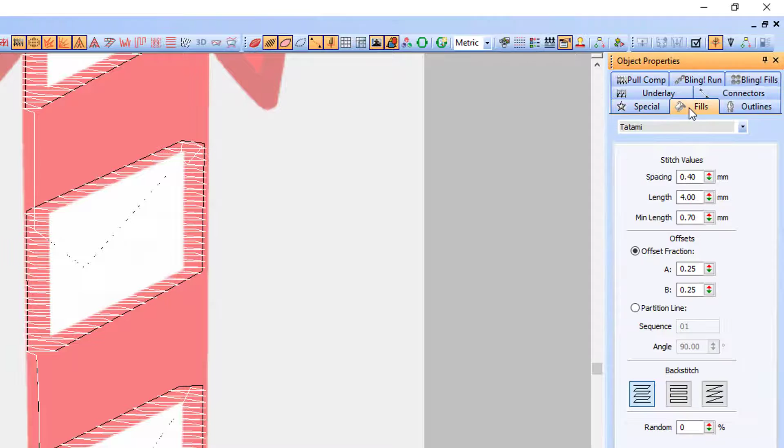Okay, so now we're going to switch to our red. And for here, what we're going to do is switch our underlay to an edge walk. And the reason we're putting an edge walk underlay is because we don't want the red and the white bleeding into each other. We want a nice crisp edge.

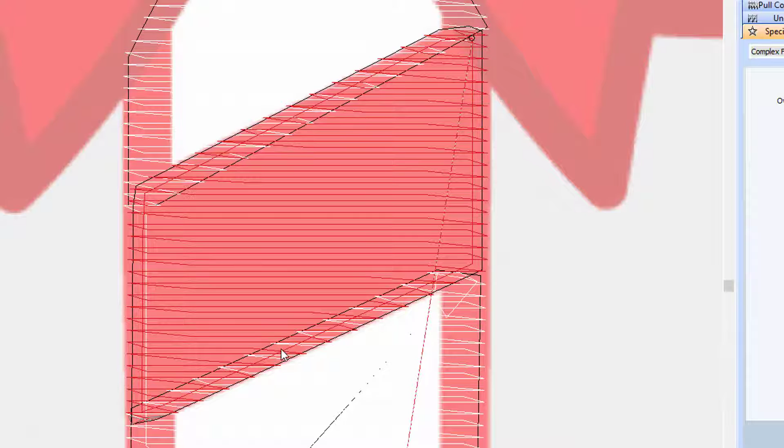And what that edge walk underlay does is it creates a sort of bridge, if you will, between the two so they won't sink into each other. So that way you get a nice crisp edge. You can also achieve the same result by giving the edges of your fills where they meet two different angles, so that way they don't sink into each other. But I want them to run in the same angle here, so that's why I put that edge walk underlay.

Okay, so we did our first red fill. Now we're going to travel to the next one using our running stitch. Click on our complex fill to do our complex fill object again.

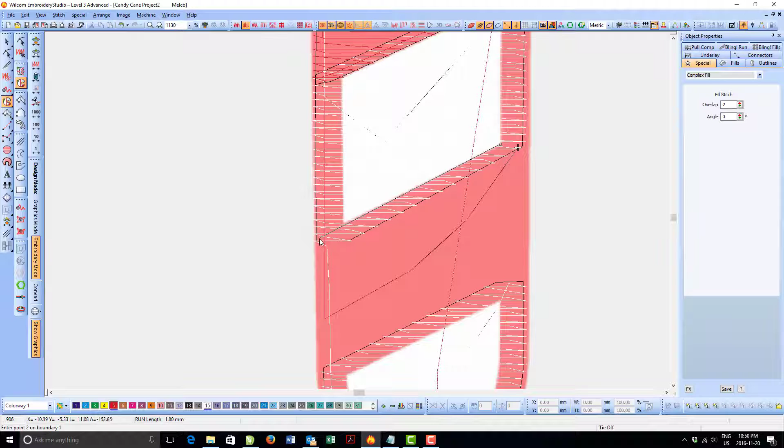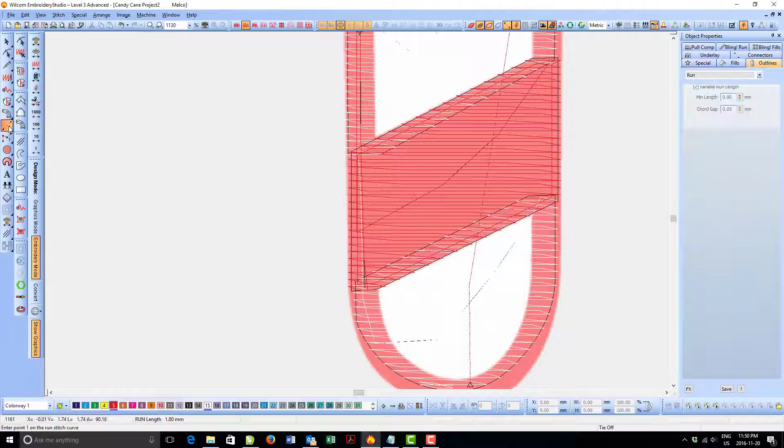Now, one thing that you need to keep in mind also is when you're digitizing and you're accounting for the push and the pull, you need to realize that the stretchier the material is, the more pull and push you're going to have, and materials that don't stretch so much, you'll have to compensate less for.

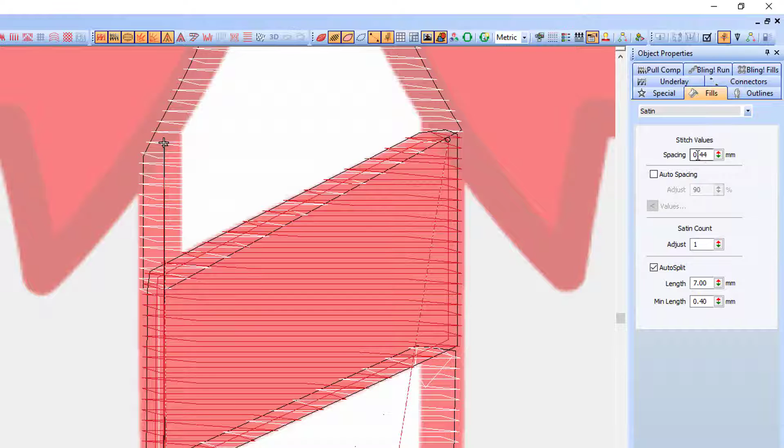Okay, so now what we're going to do is we're going to select our Input C tool or our Centerline Input. Basically what this tool is, you digitize a line, and then the software puts in a nice even column at the specific width that you give it. And in this case we're going to use a 1.5 millimeter width column. And for that width of a column, a 0.35 millimeter density should be good.

The wider the column, the tighter you want the densities. The thinner the column, you want to put less stitches, so less density. Again, because there's going to be a capping stitch, we're not going to want our stitches to sink into our fill, so that's why we put an edge walk underlay for this column as well. Again, that edge walk underlay will act as a bridge so it doesn't sink into the fills, and it comes out nice and crisp.

Okay, so now we're going to do the top part. Go back to our fill stitch. All my settings are good. 0.4, 0.7 millimeter density. Complex fill. Again, following close to the left edge and the right edge.

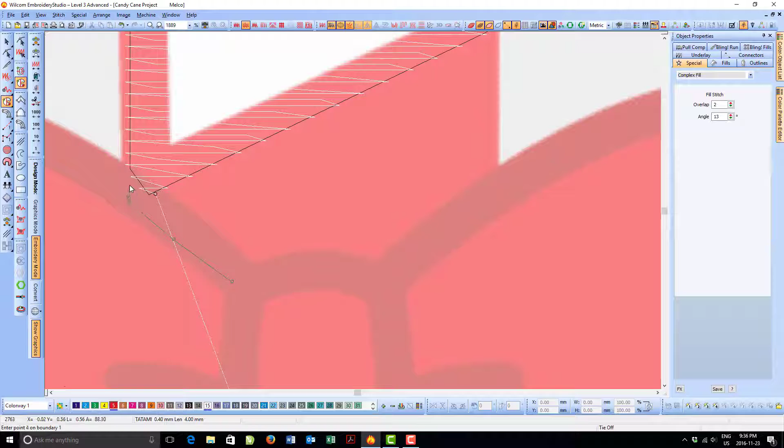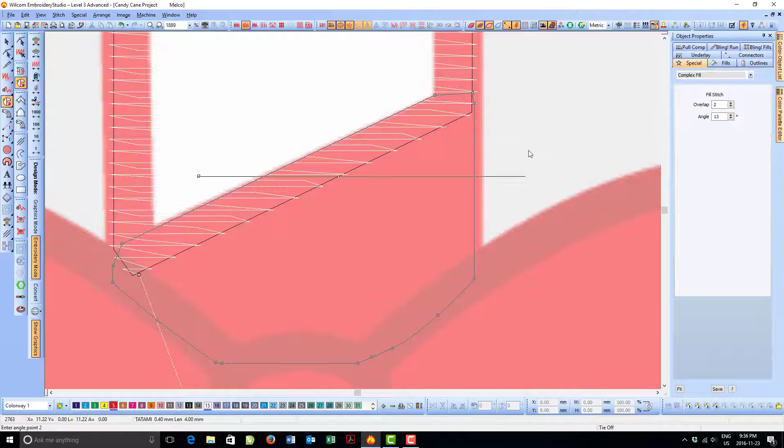Okay, switch over to our red. Zoom in so we can see what we're doing a little bit better. Complex fill. Make my fill. Entry, exit point, and my angle. Running stitch to travel to the next one. And complex fill again.

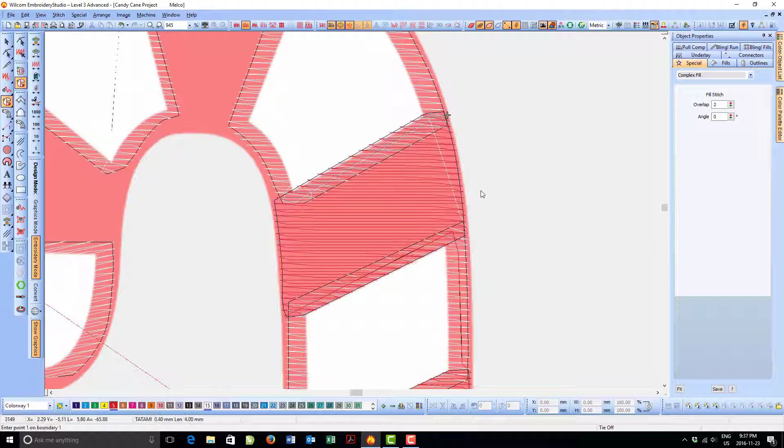Again, entry point, exit point, and my angle. Whoa, what was that? Exit and angle. There you go. Go back to our running stitch and travel to the next section.

Now when I'm finished doing the red fill, I'm going to be digitizing the capping stitch using a different method. It's the longer method. I prefer doing the capping stitch like I did on the first part, but some softwares don't have that single line input tool, so I'm going to do it also the long way.

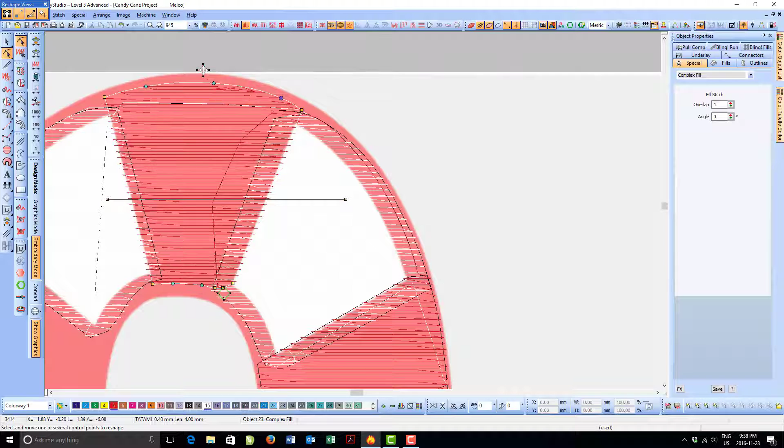Basically what the long way is, you're digitizing the whole column width and everything, not just a line and then have the software automatically put in the width. You gotta actually follow the width and digitize the whole shebang. It's more work, not as uniform, because there's always a little bit of human error. But I thought it was important that I show you both ways.

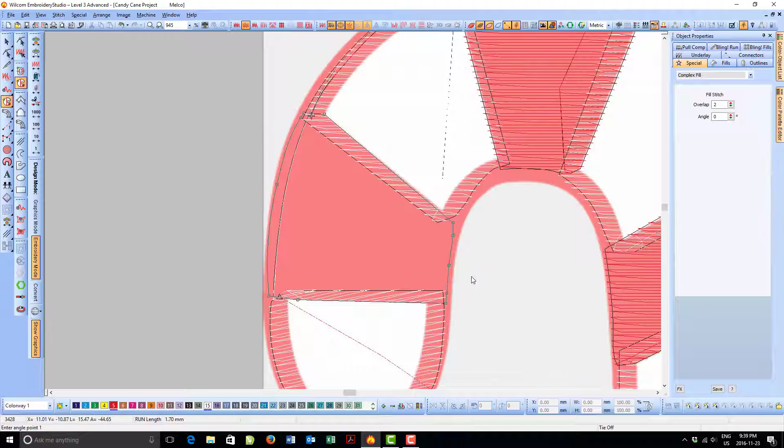Complex fill. Okay, entry point there, and exit with my angle. Why does it keep doing that? There you go. Alright. It's not very clean here, so we're going to clean things up here. Bring down my exit point. That's what that X is. Clean up some of the edges here.

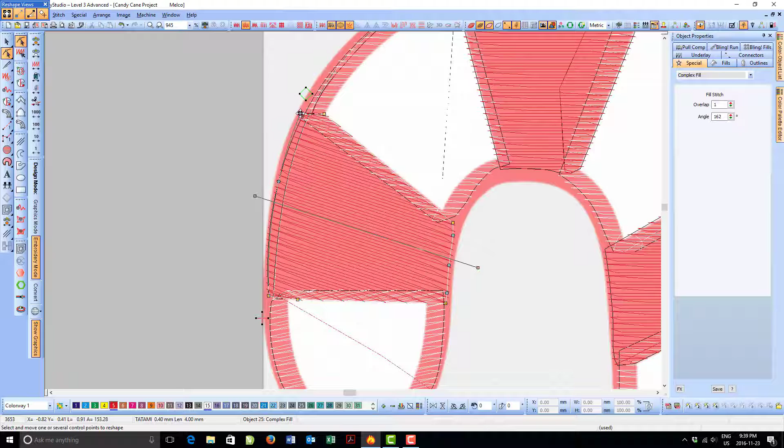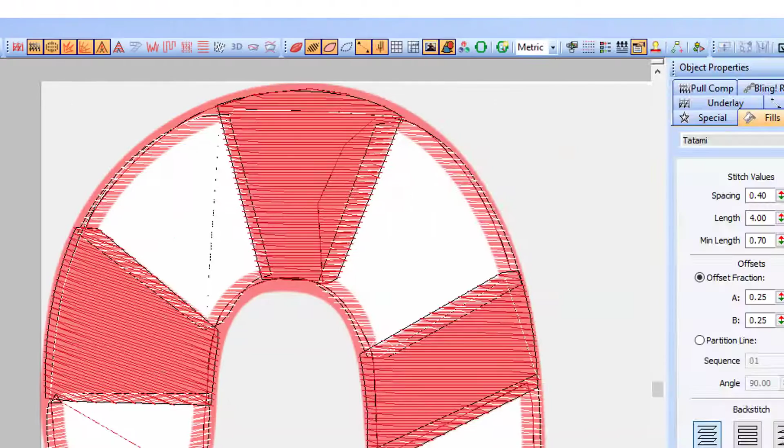Alrighty. Okay, so now what we're going to do is we're going to digitize the capping stitch using the longer method. We're going to travel to the beginning of the capping stitch. Alright. Next, what we're going to do is we're going to select our Input A tool, which is the input method for our capping stitch. Density should be 0.35, like the bottom one.

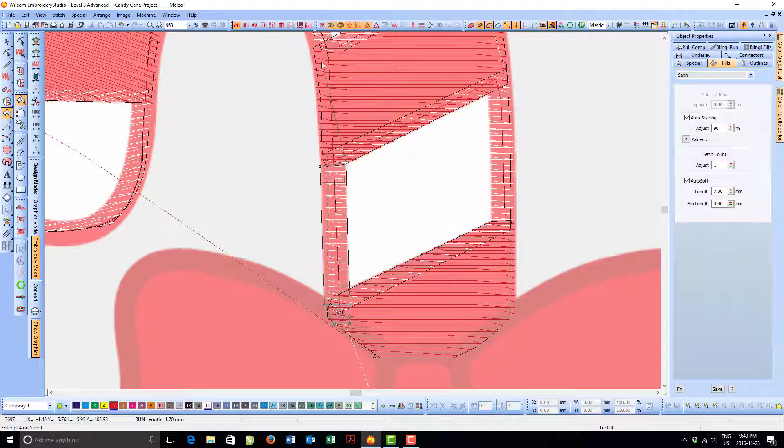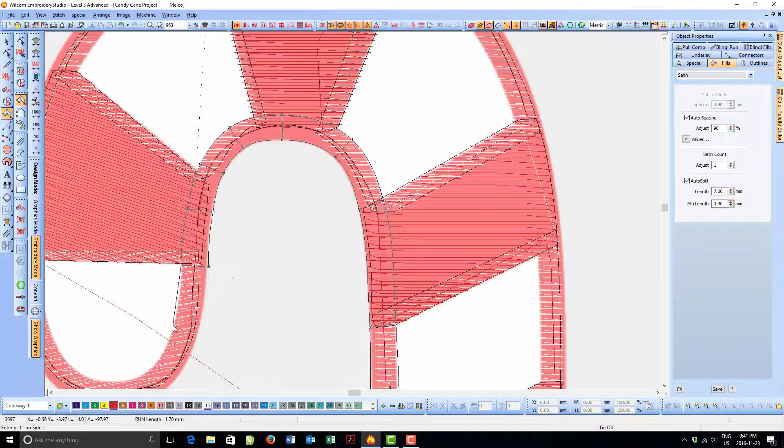And we digitize the edges of the column. So essentially we're digitizing the width of the column. Oh, I also noticed that I didn't tick off my auto spacing in my density. I should have that ticked off, and the spacing should be 0.35. So just keep that in mind.

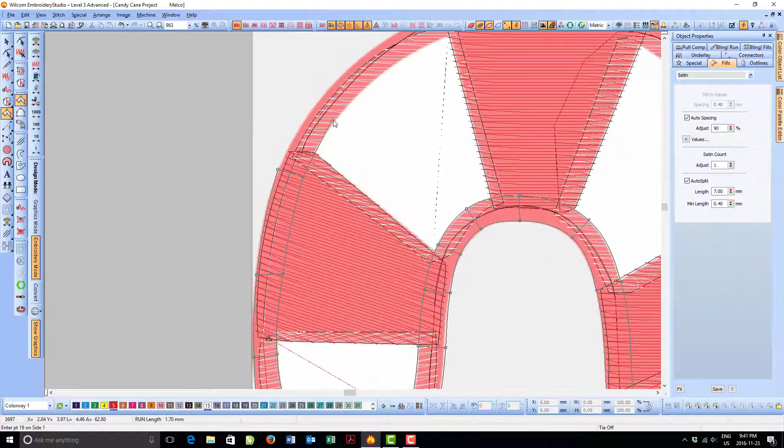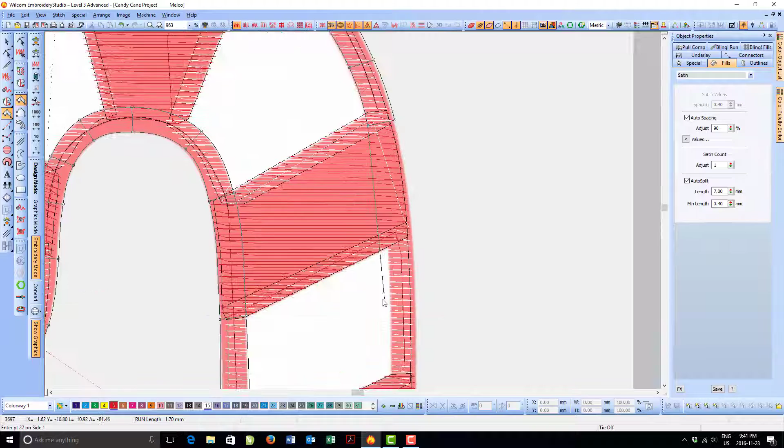As you can see, the width of the columns aren't 100% perfect because you're doing everything manually here instead of having the computer follow the one line that you digitize and then laying an equal width column throughout that whole line. But like I said, not all softwares have that Centerline Input. And there you go.

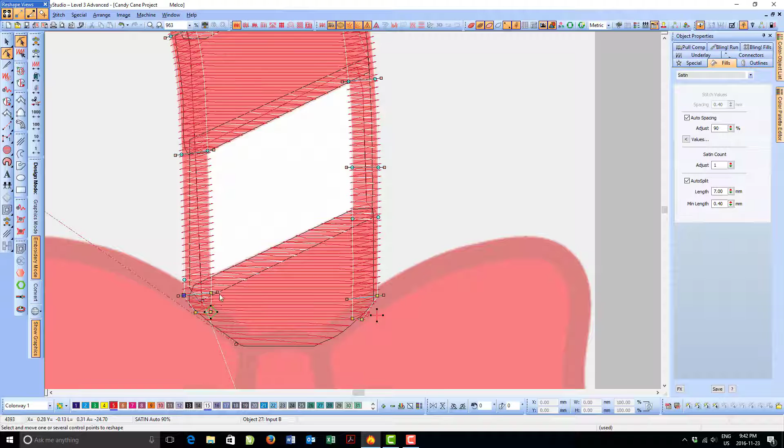Clean this up a little bit here. The other thing I forgot to do is set the underlay to the edge walk underlay for the column. Okay, so now we're going to digitize the bow. Again, we're using our complex fill tool.

Staying close to the edges, and then the bottom and the top you go more towards the middle, keeping in mind the push and the pull. Okay, entry point, exit point, and my angle. There you go.

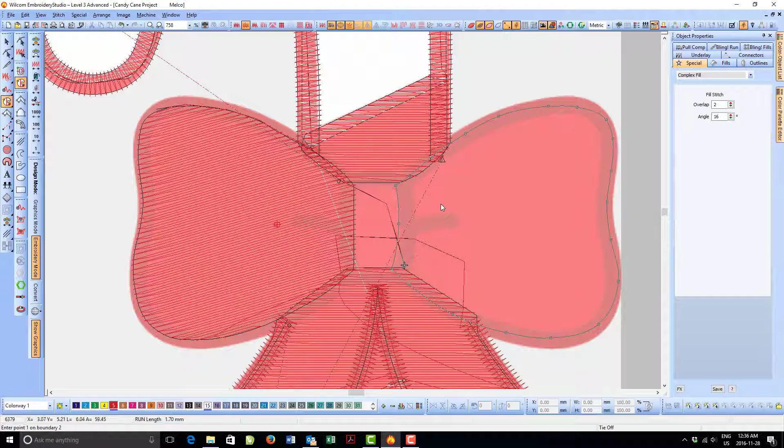Okay. Again, keeping in mind to stay close to the edge on the left and right, and not so much on the top and the bottom. Entry point. Oh, well. Entry point, exit point, and my angle. Now I'm changing up my angle a little bit so that it gives a little more definition when it embroiders. And travel to our next section.

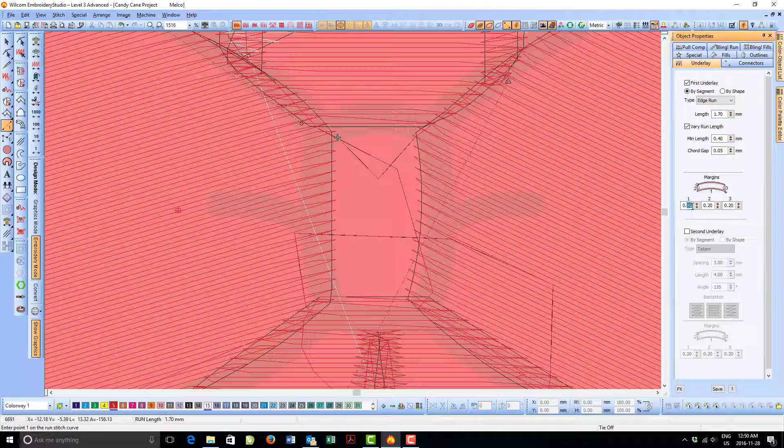For this part, I'm going to be digitizing with satin stitch instead of the usual fill stitch that we've been doing. And I'm not using the complex fill tool, I'm just using the input A tool.

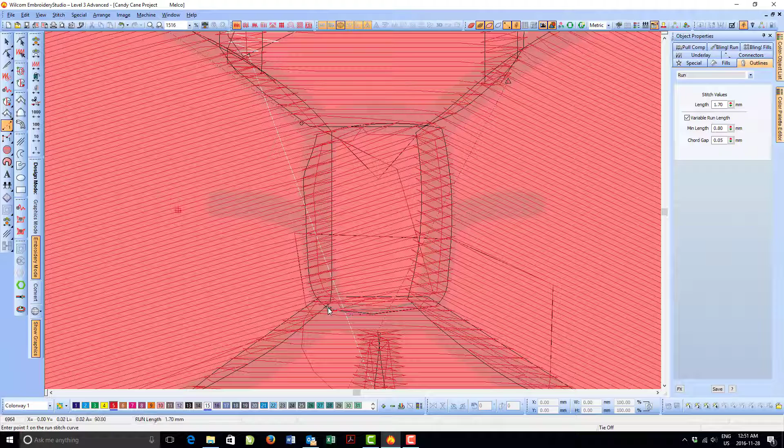Notice the angle that I'm digitizing it at, just so that when I put in my capping stitch, I tried to avoid the capping stitch being 100% perpendicular to another satin stitch, because when it's 100% perpendicular, the stitches tend to be pulled apart when you come over with the capping stitch. But by putting it on a bit of an angle, it keeps it from splitting the stitches open.

Going back to our input C tool or Centerline Input to get our nice even columns. Run to the next part.

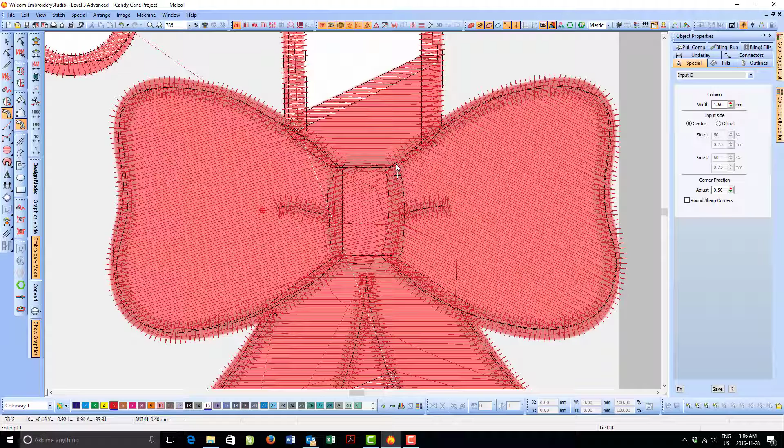Now you notice that when I'm running from one part to the other, I try to stay inside sections that are not embroidered yet, but will be embroidered later on, so that it covers it up nicely. And it also doubles as an underlay. And travel again. Okay. And the last part of the bow. And voila.

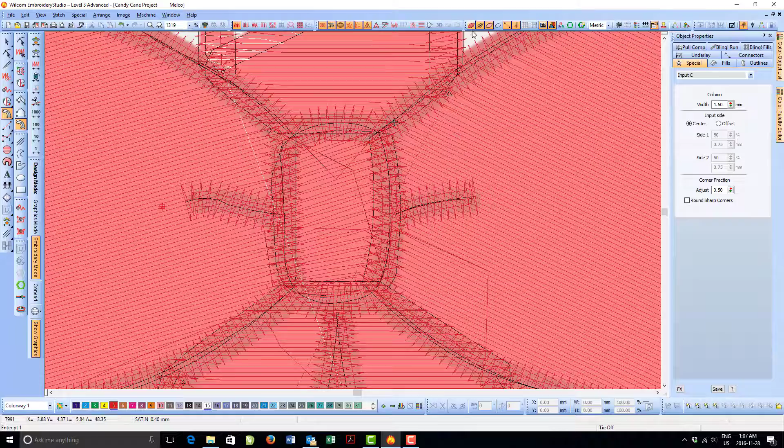And you see the effect that by me putting in that satin stitch on the very center of the bow, it gives it a different look. It gives it more definition. Looks nicer. Okay.

So what we're going to do now is we're going to digitize the universal underlay. So I've backed up to the beginning of the design. I've selected my complex fill, and we're going to set our density for a fill stitch of 1.0. That's going to be our underlay, so we don't need any underlay underneath our underlay. Okay, and we're going to start digitizing. Zoom in so that we can see better what we're doing. And we're digitizing our complex fill for our universal underlay.

Now you can't get too close to the edges on the side because you don't want that underlay to poke through. You want it to stay within your design. And as you can see, we're encompassing the whole logo. And that underlay is going to serve as an underlay for all the objects. And what that does is it's going to keep everything nice and tight from the very beginning of the logo, so that things tend to line up a lot nicer than if you put an underlay for each single complex fill.